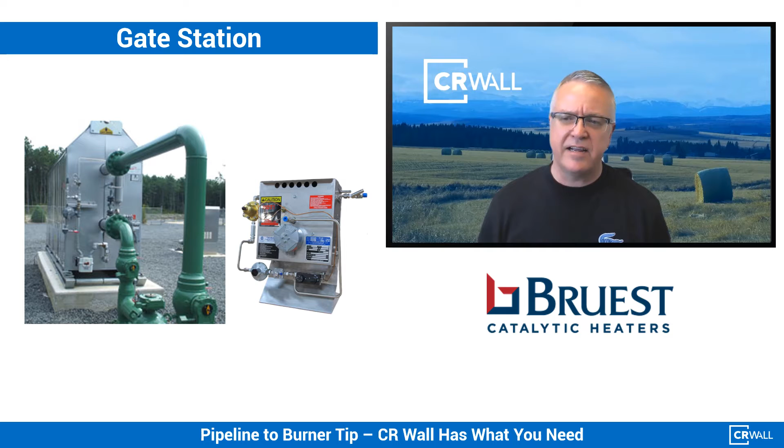Our SICK ultrasonic meter, the FLOWSIC600 - to explain, we are the distribution partner in Eastern Canada for the FLOWSIC multipath ultrasonics. And in the West, we are the distribution partner with the Honeywell Elster Q-Sonic Plus ultrasonic meter. Ultimately, we definitely know ultrasonic meters. So sorry for the confusion, but we have a range of alternatives for you to choose from, including the GT turbine meters as well, which are widely used across the country.

Honeywell Mercury instruments, we've been a national distribution partner for, well, what seems like forever - I think about 35 years at least in Canada. We have 2 Measurement Canada accredited labs, we do verification and sealing for all of the Honeywell Mercury products. The EC350, their newest electronic volume corrector, unsurpassed, incredible capabilities, very feature rich, especially suitable for a gate station or meter large custody transfer application.

With that, we have all the wireless telemetry options that are available through the MI wireless portfolio, CloudLink cellular 4G LTE modems, and the new Control Edge RTU from Honeywell. This is packaged -40 operation, class 1 div 2, all the IO that you could potentially want. This product is exceptional and very low power design, very feature rich. And again, we supply and service this product.

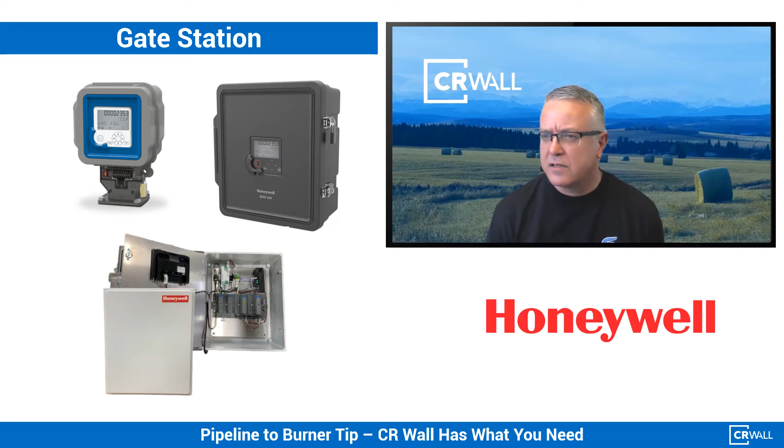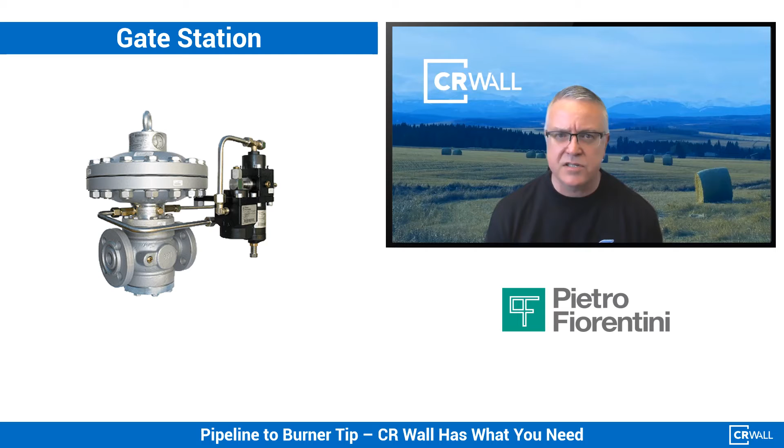Regulation - we represent Pietro Fiorentini nationally, and distribute and support. This is without a doubt one of the broadest, deepest portfolios of regulators anywhere. And we certainly have all your gate station requirements covered. In fact, many of your organizations have Fiorentini products in your gates as we speak.

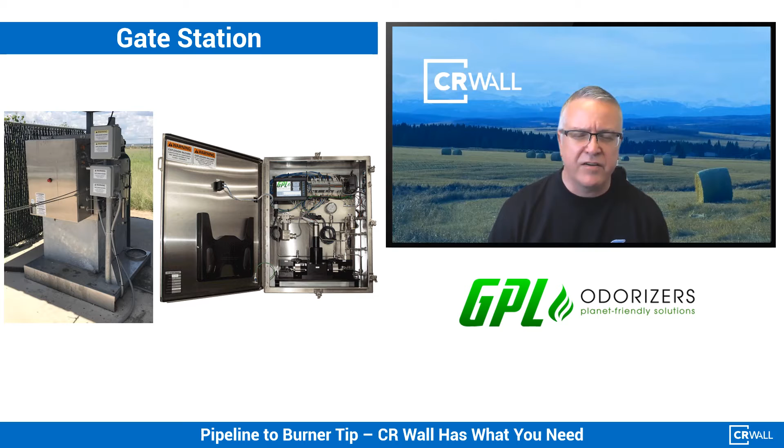GPL Odorizers, this is a fairly new addition to our portfolio just over the last couple of years. Just an exceptional both injection style and drip style odorizer. The drip style odorizer is extremely well suited for those highly variable loads, basically on, off, intermittent flow, all the way up to 1.2 mmSCFH. Exceptional product, we know these people for a very long time, manufactured in the Denver, Colorado area.

And lastly, Welker. Welker, we have everything from their filters to their insertion probes, anything for gas sampling, turbine oilers. So we've certainly got you covered at your gate stations.

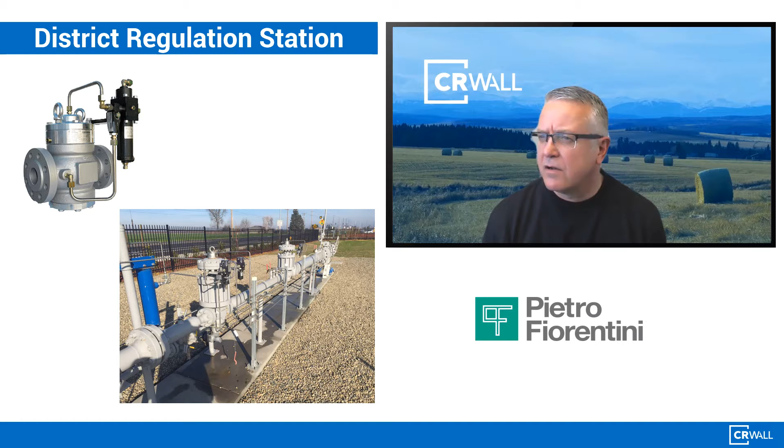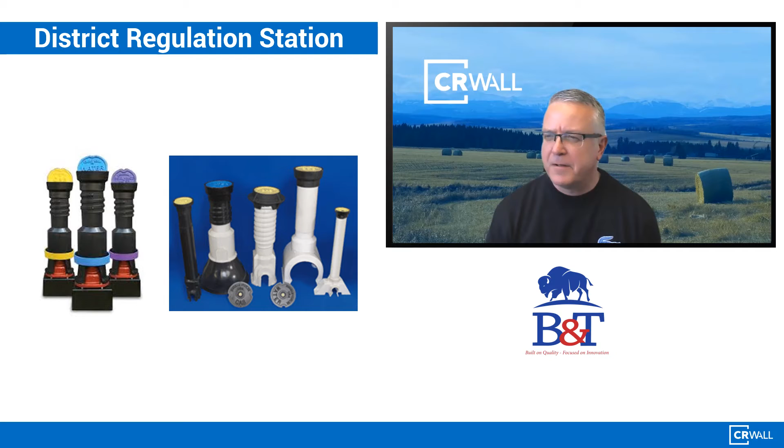We'll be happy to help with your sizing and application engineering with these regs. We have very capable engineering staff on our CR team. Also, the RUB valves, station valves for buried service, your Bingham and Taylor valve boxes. I still find it surprising that so many companies are building or fabricating their own. These are well-designed, well-engineered products.

Of course, the Honeywell ERX 350, the brand new wireless electronic pressure recorder, up to 3 pressures. A virtual 4P is available, battery powered, solar, or grid power, whatever you choose. Cellular wireless telemetry on board, and for solar applications we'd move to the MI wireless platform where extra power is required. Typically we migrate there.

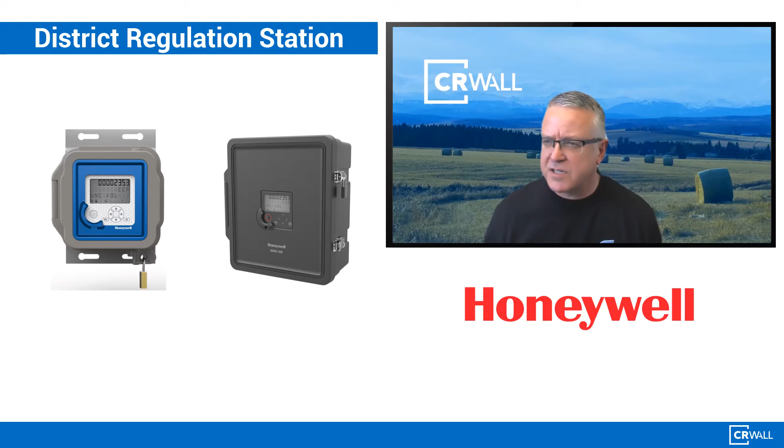And last but not least, the SICK FLOWSIC500 ultrasonic meter. Might seem odd to include metering for a district reg station discussion, but the truth is I get often asked about adding metering to district regs to provide better visibility on system performance, better data to support system planning and hydraulic models.

FLOWSIC500 is really an ideal meter for many of these applications because, firstly, being ultrasonic, there are no moving parts. It's a fail-open meter with tremendous turn down, really unparalleled, up to 200 to 1 turn down on this meter. Requires no specific inlet or outlet piping either. If you could mount this meter on an elbow, it would work just fine there. All the flow conditioning is inbuilt. It's a 2-path with a 3rd diagnostic path on board. Outstanding product.

Commercial industrial meter sets specifically. Again, FLOWSIC500, as I mentioned when talking about the application in district regs, really versatile and capable meter. It has an inbuilt corrector. If you look at the upper portion of the meter, it separates from the lower body, the meter body, and can be field replaceable. Measurement Canada approved, of course.

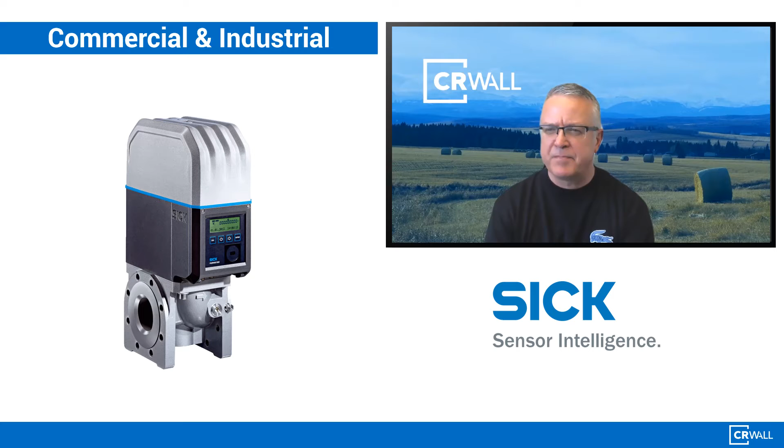Honeywell Mercury EC350, the new corrector. For your large commercial and industrial, large transportation gates, this product is unparalleled. The configurable memory for data storage, configurable logs, there's nothing like it in the business. Mercury protocol or Modbus protocol on board native. Incredibly capable, has the option for an inbuilt cellular modem in the same enclosure. Really one of the most feature-rich volume correctors anywhere in the world.

We also offer the Rabo Rotary meter, the Honeywell Elster RABO Rotary meter. Exceptional product, fairly new for us here. Measurement Canada approved, very well designed, great turn down, very long life because of the design and the slower impeller rotation. The meter body is incredibly rigid. So anywhere, you know, everybody's had issues with binding, etc. with your rotary meter installations, this product is designed to help alleviate some of those challenges.

Now, with the Honeywell portfolio, we have complete access to all of the wireless telemetry again, and the meter data collection and wireless pressure monitoring solutions through PowerSpring. PowerSpring, over 60 installations in North America. It is purpose-built, designed ideally for your larger transportation customers, anywhere you need interval data. We have wireless pulse accumulators to work with third-party or native protocol support for both the Mercury protocol and Modbus now, which is a brand new release for PowerSpring on the R300 release.

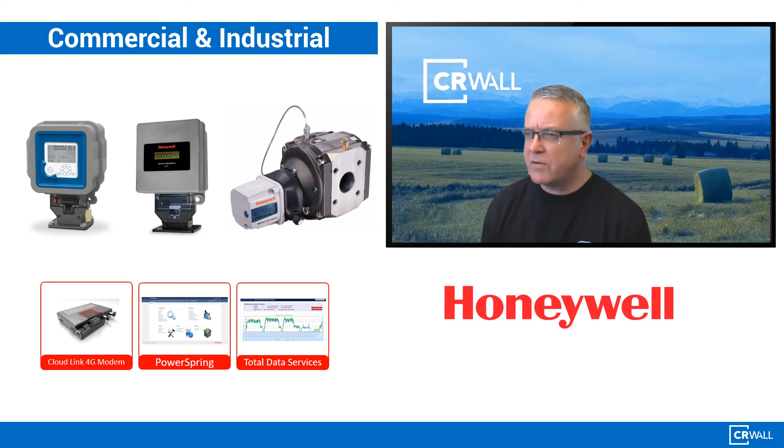Commercial and industrial meter set regulators, the PF8120 and the Dival, Norval from Fiorentini. Again, with the PF8120 balanced valve design, single orifice, internal monitor option, internal slam shut valve option, just outstanding regulators, great partner. The PF8120s and the Fiorentini FE regulators are all manufactured now in Weirton, West Virginia.

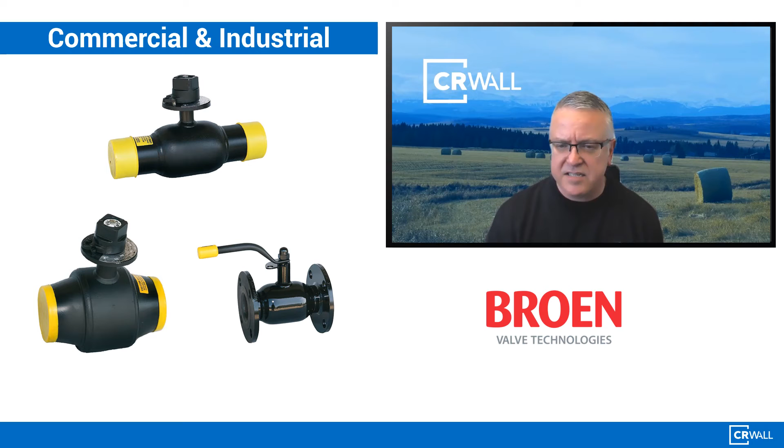Ball valves as well, isolation valves for your commercial industrial meter sets. In fact, many of you are already using the Broen, either premium or utility ball valves. Exceptional product, great supply chain, really good partners. Manufacturing based in Houston, and we can supply just about any valve you would need anywhere in your system. So please give us a call.

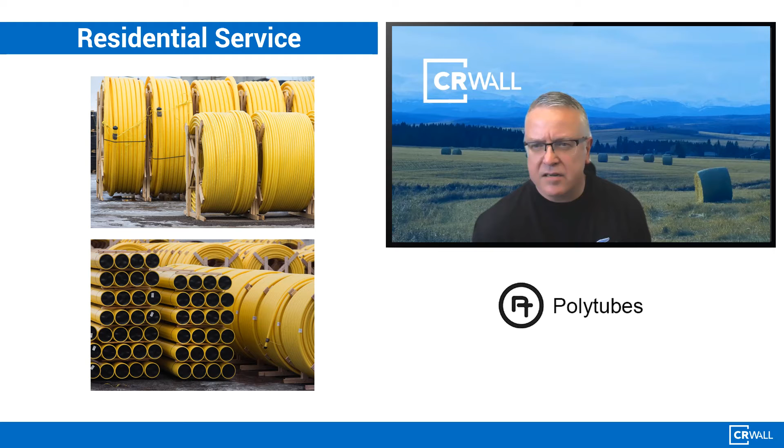As we continue the journey through your gas system, residential service, again just full scope. We provide everything from the connection to your service line all the way to the outlet on the customer meter set, whether it be your PE pipe, your excess flow valves, the tracer wire, your prefabricated meter sets. Like we were talking about emissions reduction earlier, many of you are now moving towards or looking at prefab, pre-bent meter sets to eliminate threaded connections and reduce the emissions around those threaded connections.

Risers, transitions. We are the national, and largest, Georg Fischer distributor. We have at any given time well north of $1 million worth of stock on our shelves. So we're here to help.

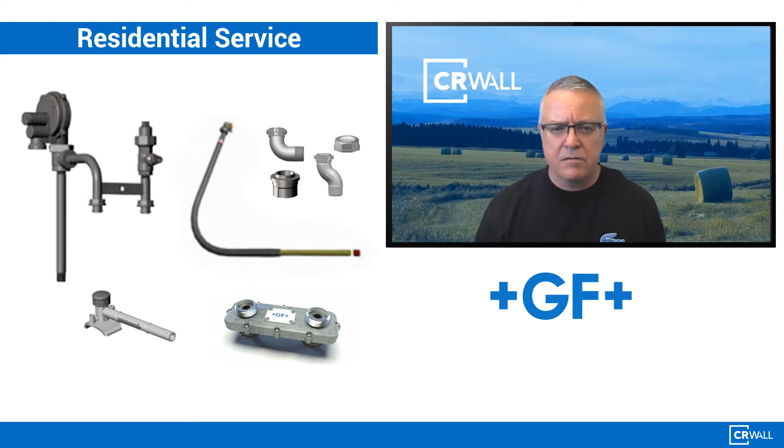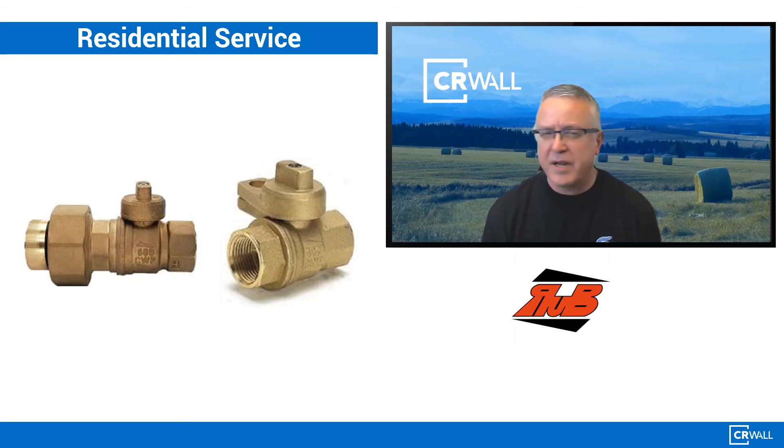Meter set valves, look, we know what the industry standard has been, but there's a real migration now to brass meter set valves. The RUB line is exceptional, and we are the national distribution partner. Peterson Pete's Plugs, industry standard, we are the master distributor for those and have thousands on our shelf at any given moment.

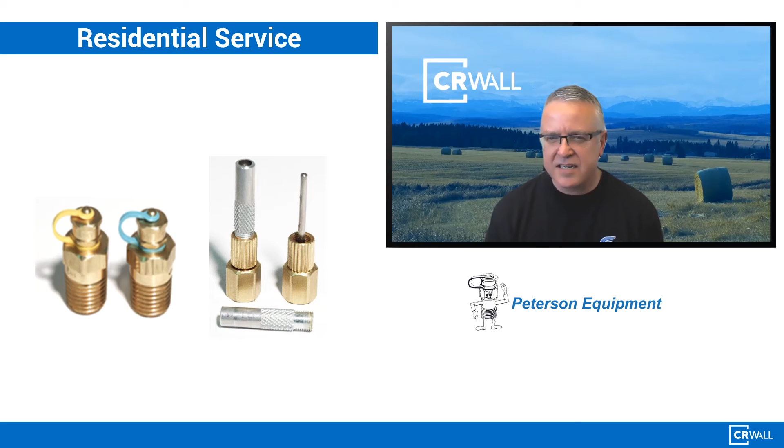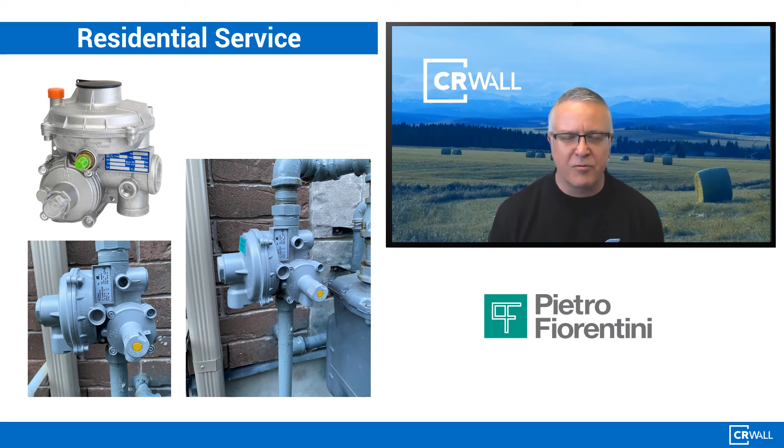This is an exceptional regulator with the OPSO option on board. One regulator can cover the entire capacity right up to a 400 class meter set. Very high quality product. We stock it. It's a game changer, hydrogen ready. If you're not already looking at the FE, I'd certainly encourage you to give us a call.

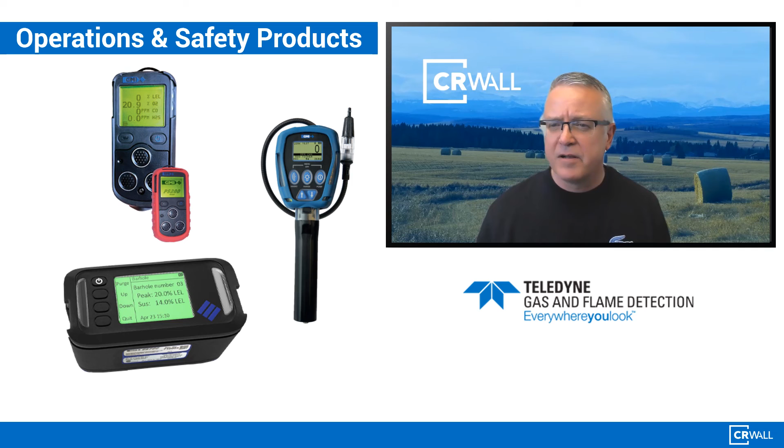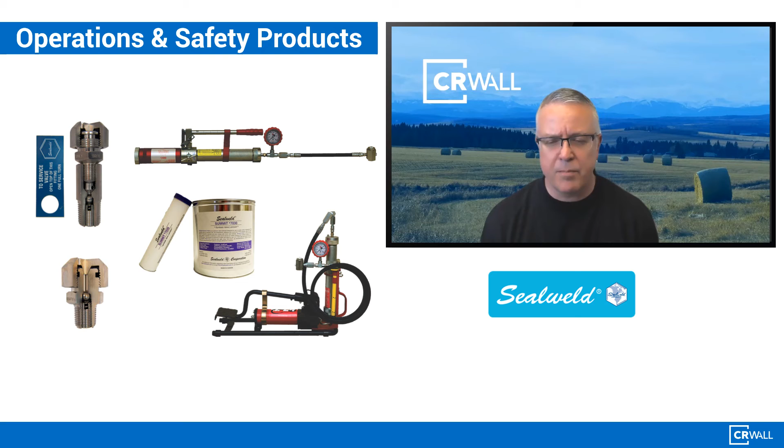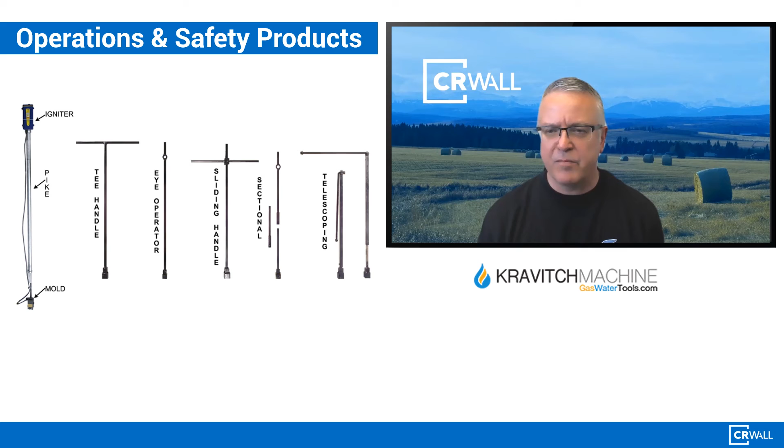Kravitch tools for all your keyhole or system tool needs. Again, if they don't have what you need, they'll engineer it for you. We've been longtime partners with Kravitch, so please let us know.

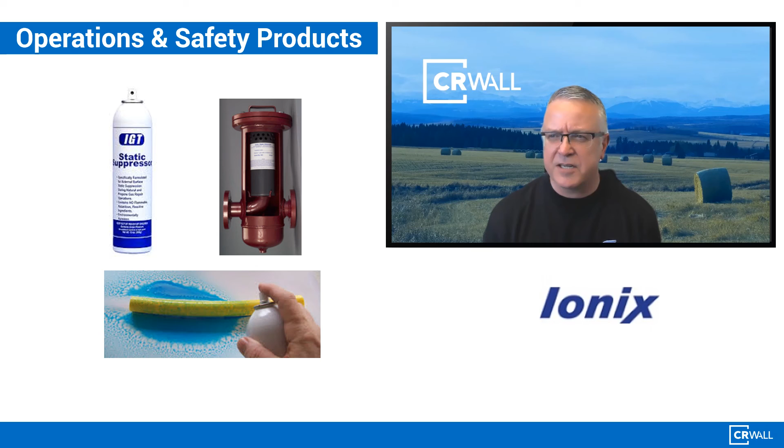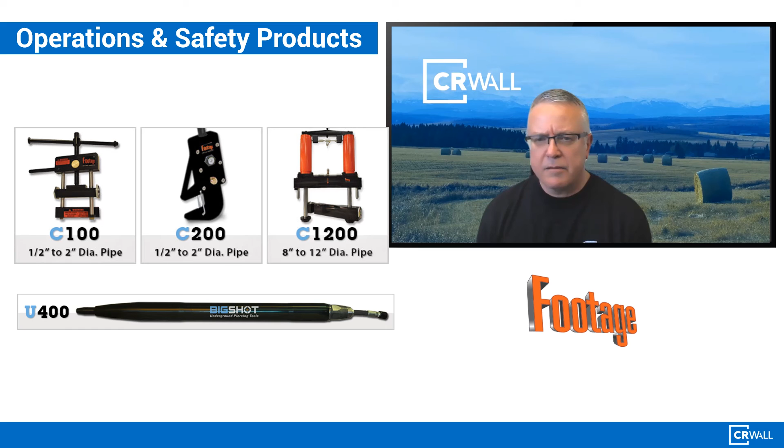I want to talk a little bit about CR Wall Energy Services as well. We very much service what we sell, as I mentioned earlier. We also have a team that does field installations, field repair, and commissioning work. We do all of the GMI factory authorized repair, and all the repair and refurbishment for Sealweld pumps.

We are currently working to open up our gas lab in Calgary as well, so both a Cambridge and Calgary facility, and we're here to help. If you have a service requirement, let us know - let's talk. We continue to build out our service organization, dependent on what your needs are. So if you're looking for third-party service, please get us on your list and drop us a line.

Last but not least, the CR Wall Gas Academy. We have spent the last year building out a resource, a tool. We believe we're a knowledge-based business and want to be the go-to for all of you when you're looking for information and education. CR Wall Gas Academy is all about delivering education and training. I believe we've had about 14 or 15 web events and training sessions over the last year and are continuing to scale that up.

We certainly hope it's of value to you. Please reach out and let us know if there's content you would like us to provide. Gas Academy is really all about what you guys need from an education and training perspective.